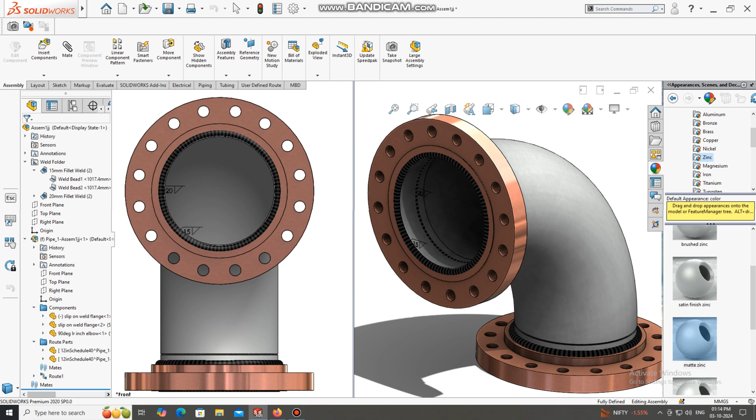So guys, today we are going to create this 12-inch elbow in SolidWorks.

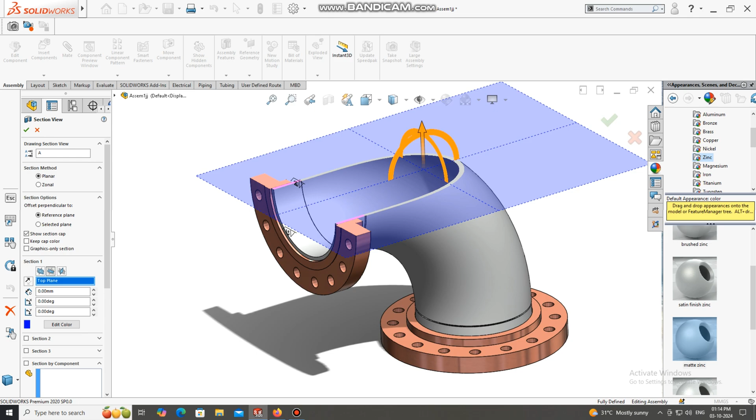So let's see how we create this elbow in SolidWorks by the help of pipe routing. So we have to just create this elbow first. Then after we will apply the welding. So here we can see the section view.

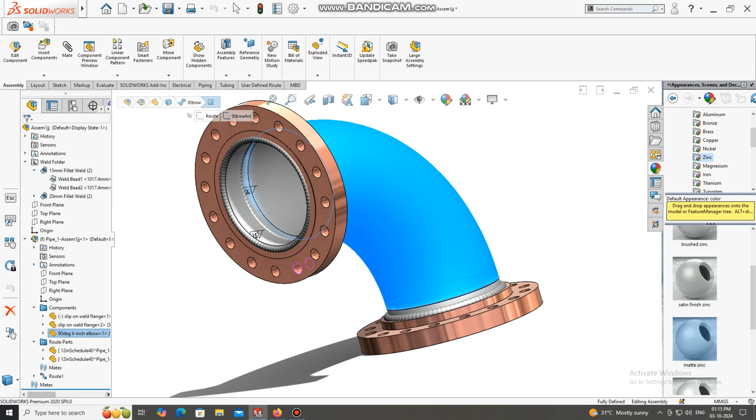Okay, so this is the section view of this elbow design, and this is very helpful for beginner students who want to learn SolidWorks. So look how we do this in SolidWorks routing, pipe routing. Okay, so we have just started drawing this sketch and elbow.

So go to the file, select new. Here we select assembly. Okay, now here we change the background to plain white. Okay, now we go to the SolidWorks add-in, select SolidWorks Routing. Here go to the piping, select start by drag and drop.

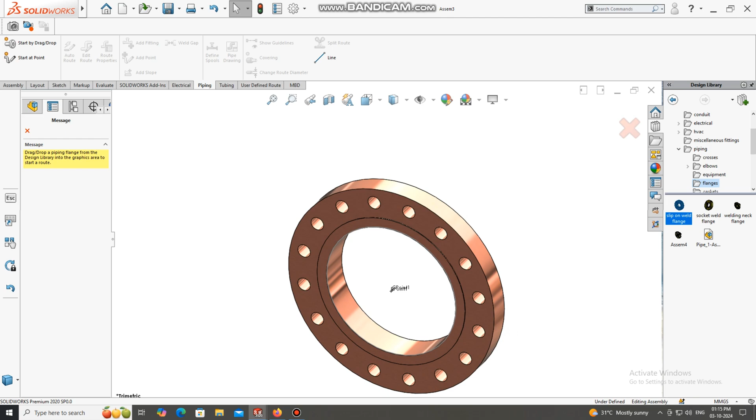Now here go to the flange, we select slip on weld flange. The sizes we will keep 300 rating, and the sizes we will keep 12 inch and NPS 12. Now you can save this file to your desktop or where you want to save.

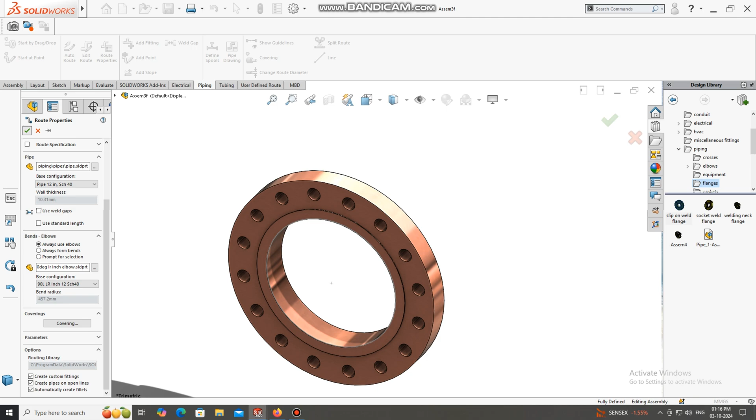Okay, so here go to the base configuration. Here we select pipe 12 inch schedule 40. Okay, and the elbow we will take 90-degree LR. Here pipe routing started, so go to the line, select this point and go below side.

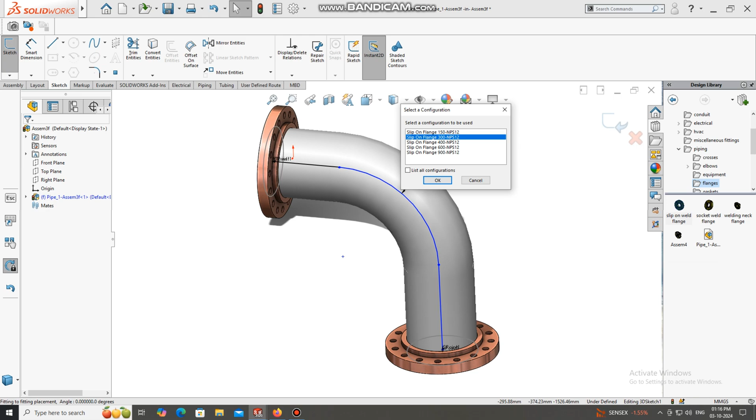If you don't find the same direction, press the Tab key, so you will get the exact direction where you want to move your pipe line, pipe direction. So again go to the flange, select slip on weld flange. Sizes we will keep 300 rating and 12 inch. Okay.

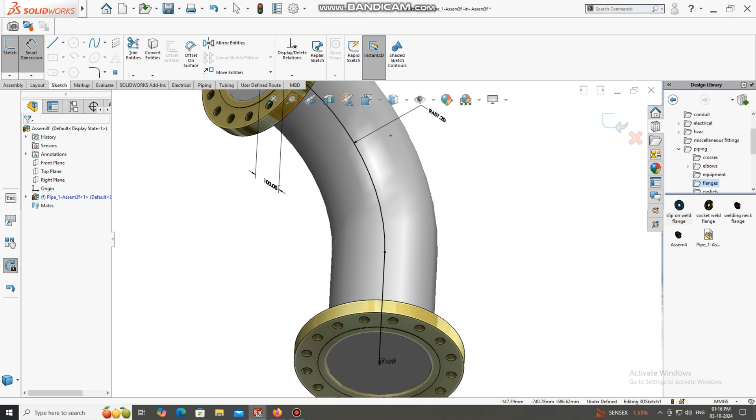So here it's time to apply the dimension. So we first select the end face of this flange and this point. Here we will keep the length 100 mm. The opposite direction we can do the same. So select this end face of the flange, select this point. Here we will keep 100 mm also.

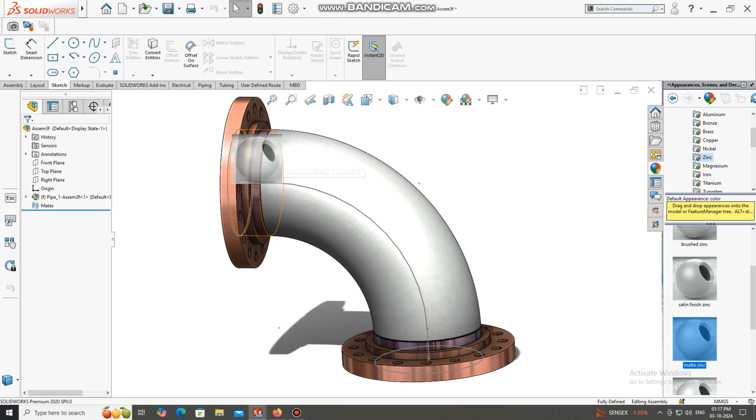Okay, so look how we create this elbow 3D model. Now here we will exit. So again we go to the material, apply the matte zinc and apply to this pipe. So look how we create this elbow like this one.

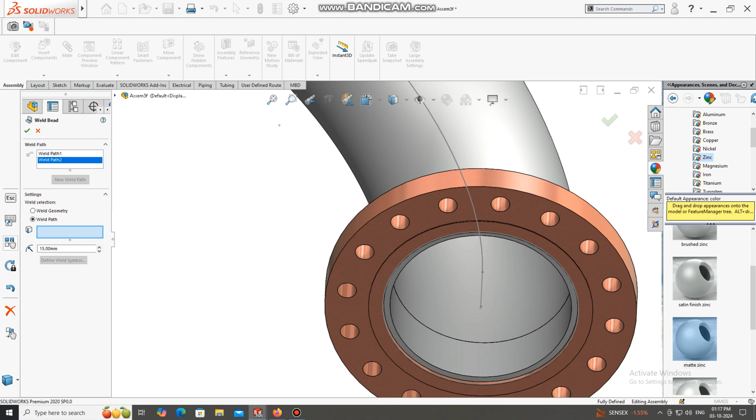If you want to apply the welding, go to the weld bead. Here we select weld path. Now here we select the fillet weld, 15 mm radius. Sorry. Now here we select welding path, so we select this edge.

Okay, here if you want to see the weld bead, go to the weld folder, right click and show cosmetic weld. So look at the welding. So again we apply the welding on the back side, so go to the weld bead. Now here we select weld path. The size we will keep 20.

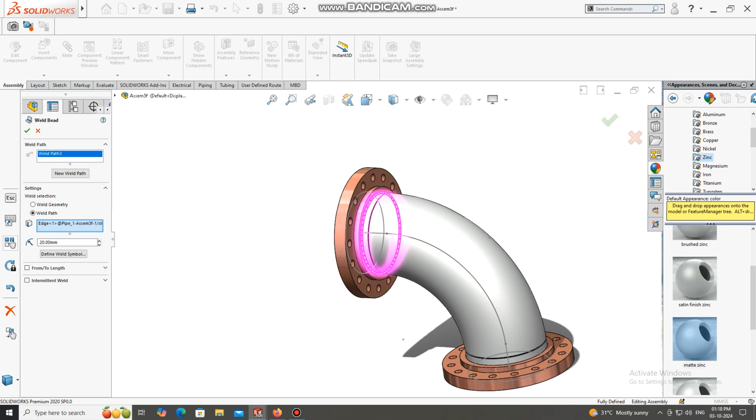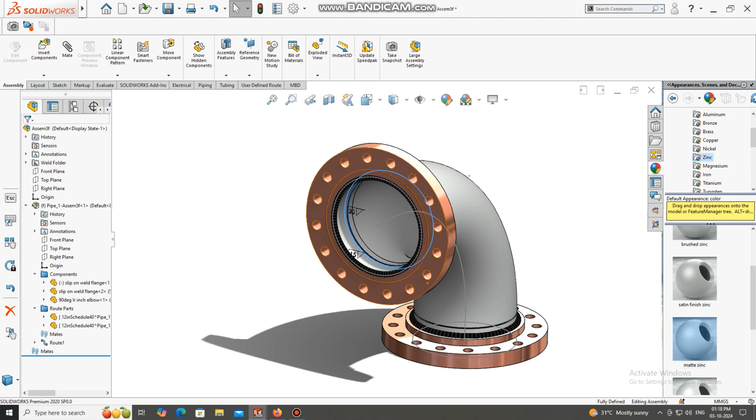Select this edge, this one also. Okay, so again go to the weld bead. We forgot previously to apply the other one. So look how we just create it. Okay.

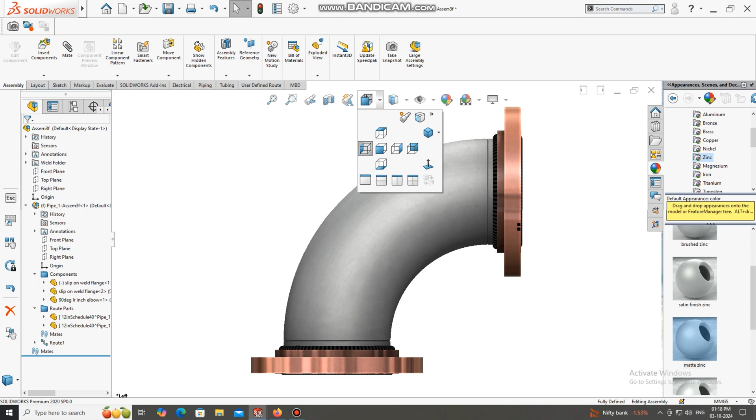So look at the view of this elbow, a 12-inch elbow, and we apply the 12-inch flange. The rating we will keep 300.